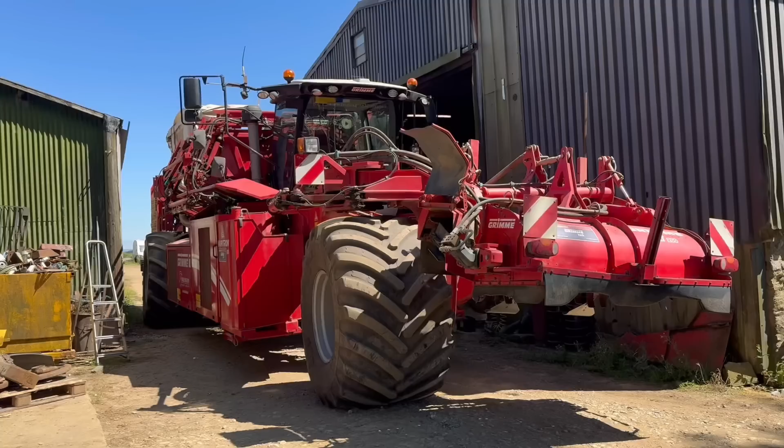Right, so what this is, it's a self-propelled potato harvester. If you've never seen one before, they're quite an impressive bit of kit. Just give you a bit of a run through on how it works first. So on the front here you've got a topper, takes the potato tops off like a flail, and then it slings the tops out the side here once it's cut them off. So that's what that front bit is.

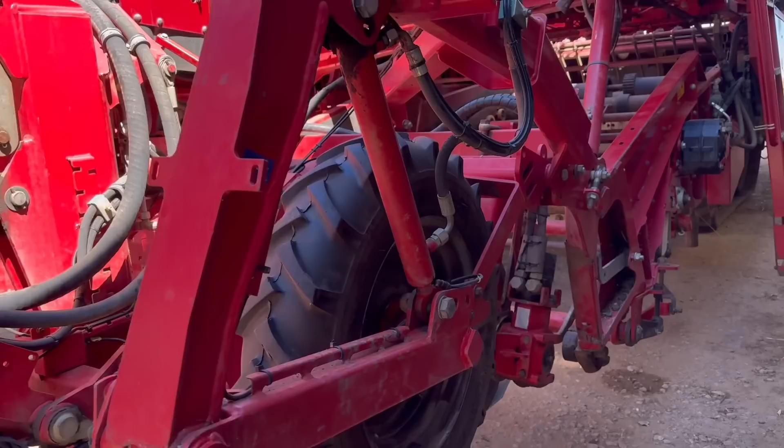I'm not all that clued up on potato harvesting equipment, so you'll have to forgive me if I get some of the terminology wrong. There's also some bits missing because they're in the process of servicing it and getting it sorted out ready.

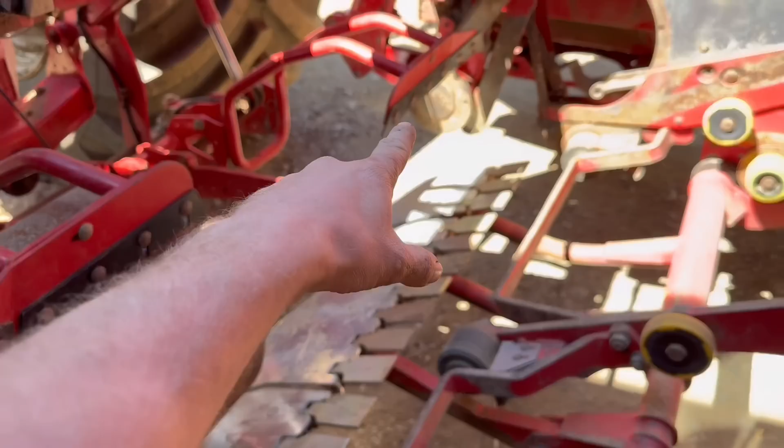So after the topper, you come to this bit here. There's usually another one of them rollers on that side, which is missing at the moment. They squash the row down while these shears or spades or whatever you want to call them go underneath the potato row and dig all the potatoes out of the ground.

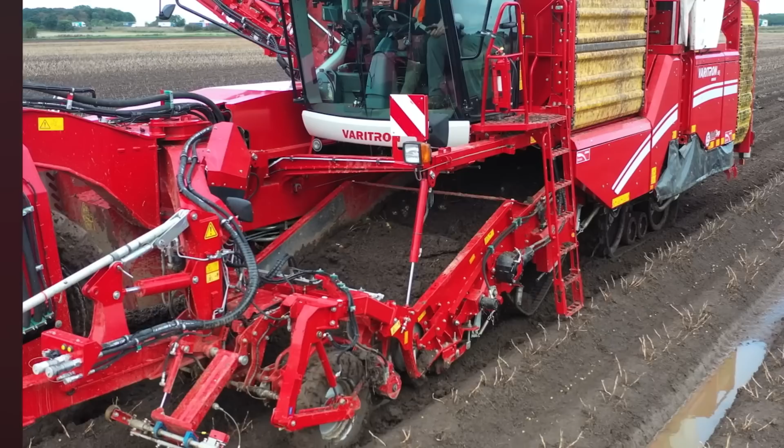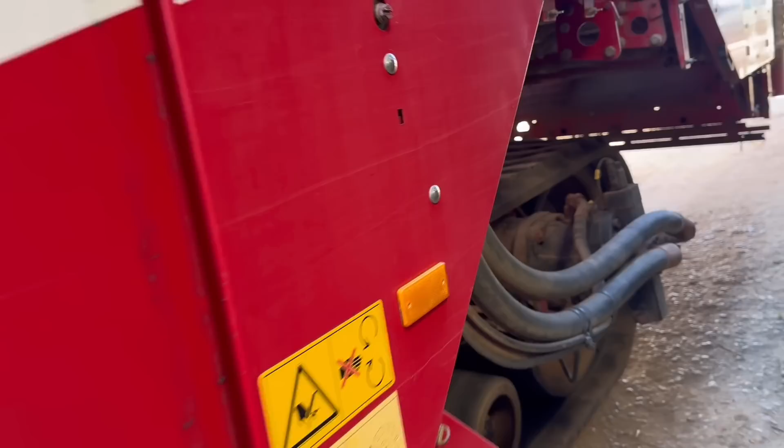And then they'll come up here, and usually in here there's a web or a big belt with loads of bars across it that take the spuds up over there, and all the soil drops out through the web. So once it's gone up there, they go all the way up here.

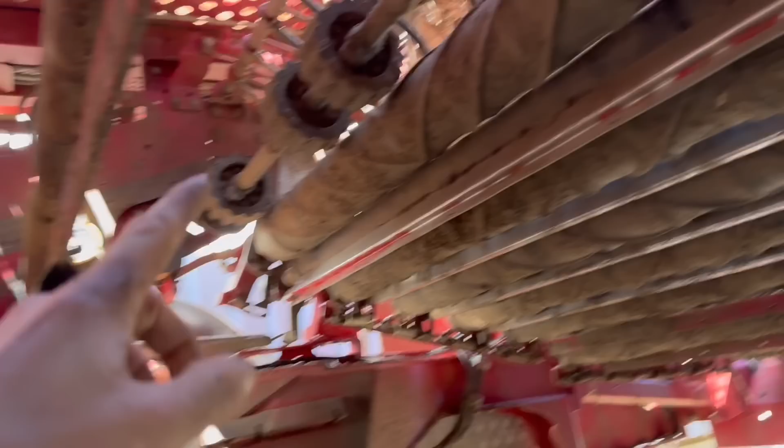I don't know if it's the same web or another one. It comes up over here, around the top of them rollers, and then onto these rollers here, the top side. Then these rollers, I think, are designed to squash all the clumps of soil. If there's any clumps, it squashes them, drops them out, and then they go over the top, down the back here.

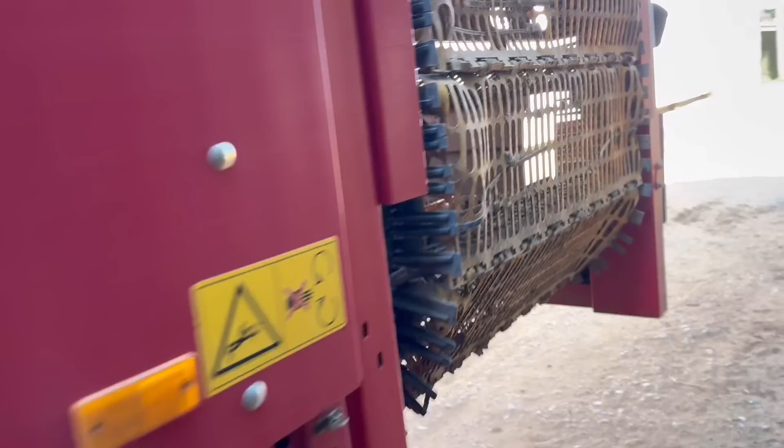So they'll come down them rollers, drop onto here. These are like what we'd have at the front, bars like that with belts, and then soil can drop through. That's what would be in the front section, but a wider one.

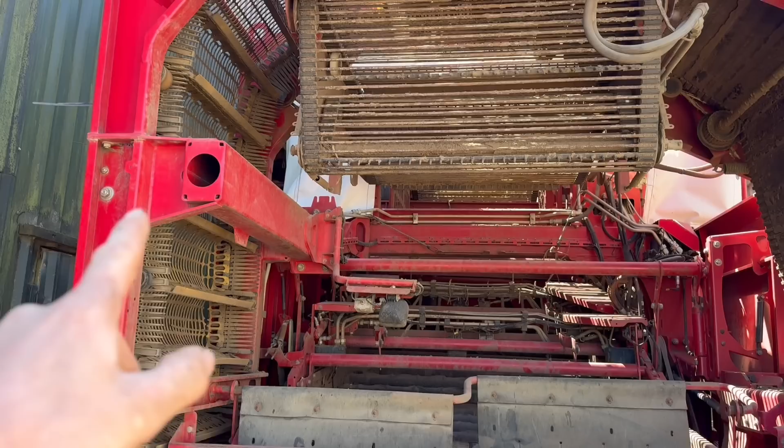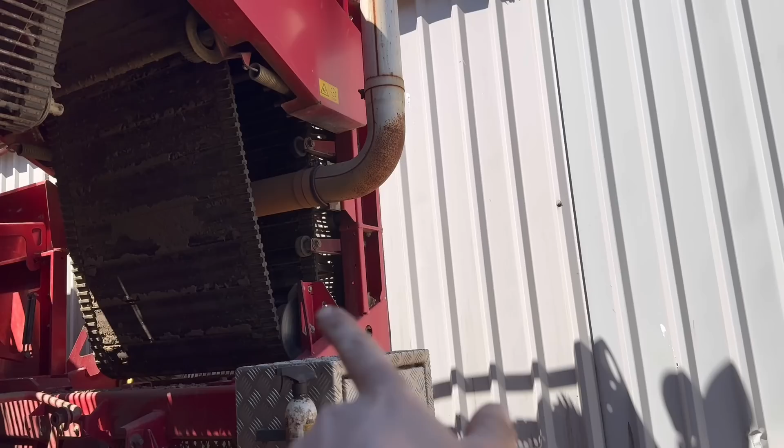So then they'll come off here, drop onto here, and then into this conveyor here. And this conveyor, or elevator, takes them around like that, up over there, and drops them onto that web. Or maybe goes that way around, I'm not sure what that belt does - maybe it stops them from dropping out. I think they go that way around and drop onto there. Then once we've dropped onto there, we'll go around here, climb up these steps.

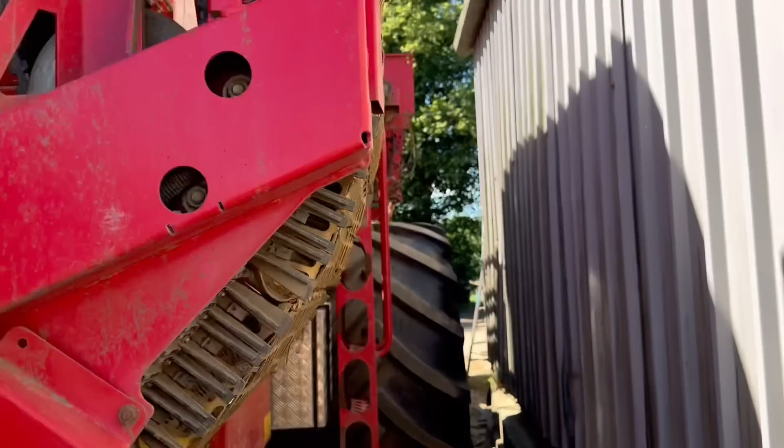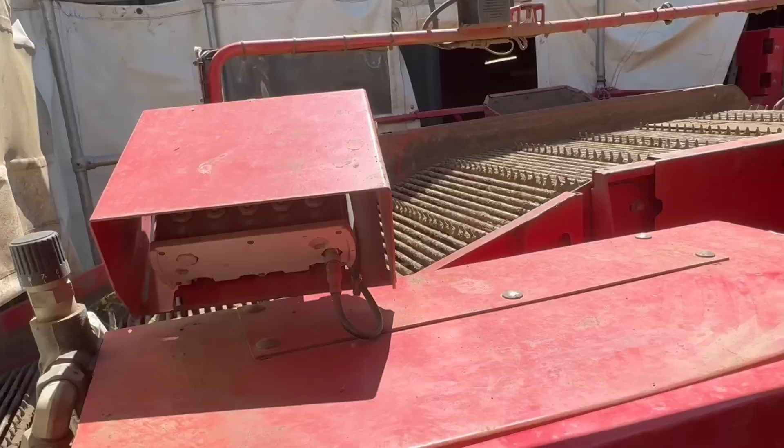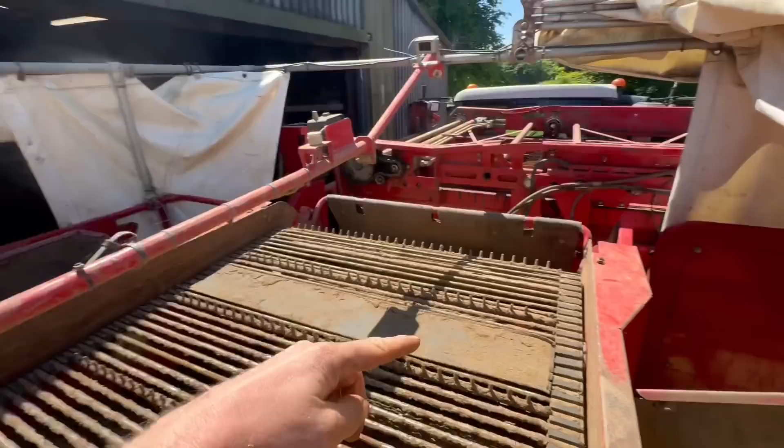And then when you get up onto here, there's another sort of belt or web, which you can see through there. That's where they've been dropped out onto here. Then they'll come up here, and you'll have 4 people stood up here - one there, one there, one there, and one where I am. They'll pick out any damaged spuds or any stones or clods that have got left behind.

They'll pick them all out and then drop them down the chute here. In this chute, there's a conveyor at the bottom that just spits them out the side of the machine. And once they've gone over here, they then go down there and into the tank.

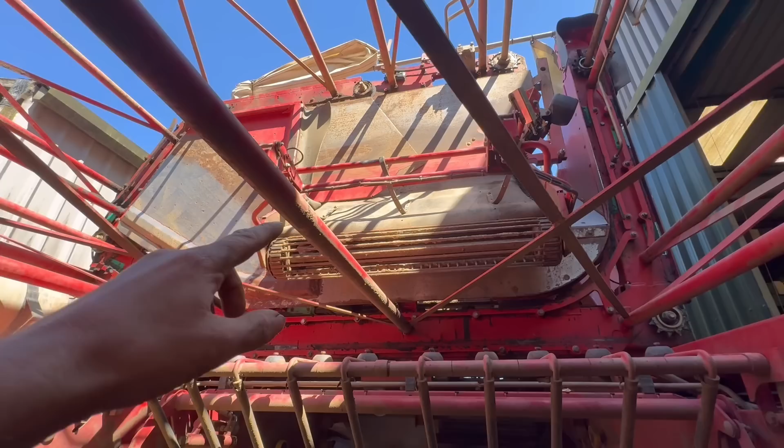So yeah, I'm sort of below the tank now. Once they've been over that last section, they'll come down here and into the tank. I'm stood below the tank at the moment, where the web would be, where the potatoes would go up over. And then there'd be...

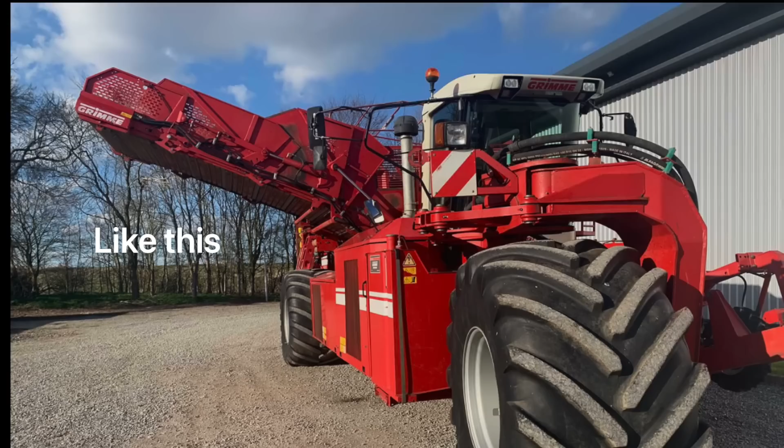It takes a bit of explaining, does this bit. That top section there folds out over. So this is like the big tank, and there's the belt or the web or whatever chain, I think, is missing out of the tank at the moment.

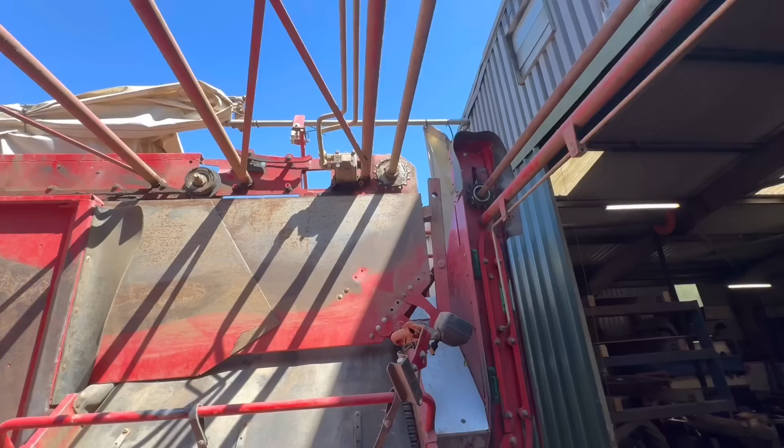I'll just climb up. So this bit from here goes all the way around there like that. There would be a chain that goes sort of around there, all the way up over there, around there, and then back around that way again.

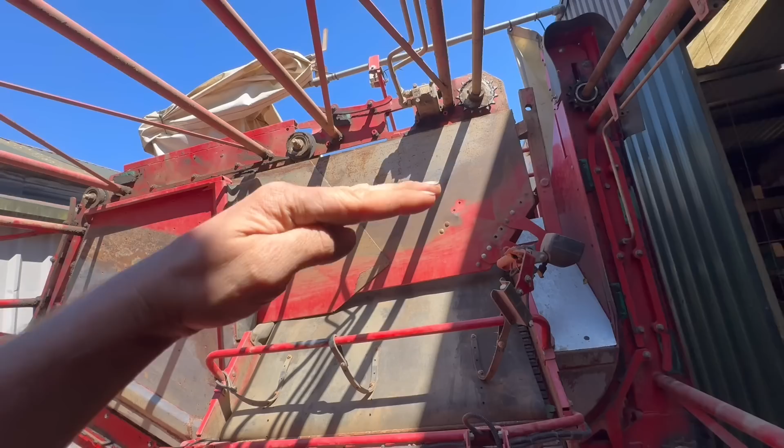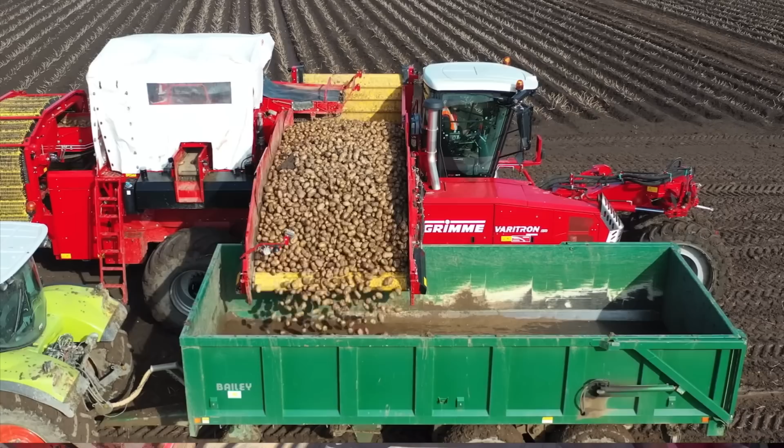It all folds out as like your unloading elevator, as well as the tank itself. So I think in here we'll hold - well, he said 2 tanks for the trailer, so I'm guessing there'll be 8-9 ton of potatoes in this sort of area once it's full.

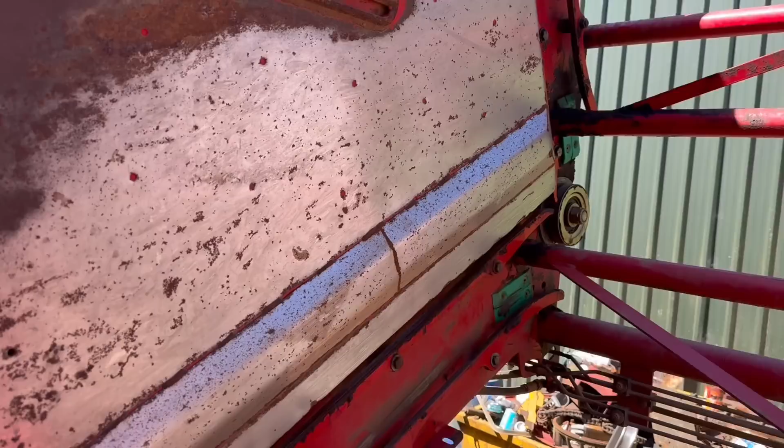I hope that's giving you an idea of what the machine does. So I'll show you what's wrong now and what's to do. On the front side of this tank frame that goes around up there, it's cracked - cracked down there, cracked all the way through there, and cracked down that other side.

Now I think that's a pretty critical point, because in the back of here somewhere, about there on the other side, is where the ram is that sort of supports it all and folds it all out. You can just see through there is where the end of the ram is, which is onto this plate here and then joins up onto there.

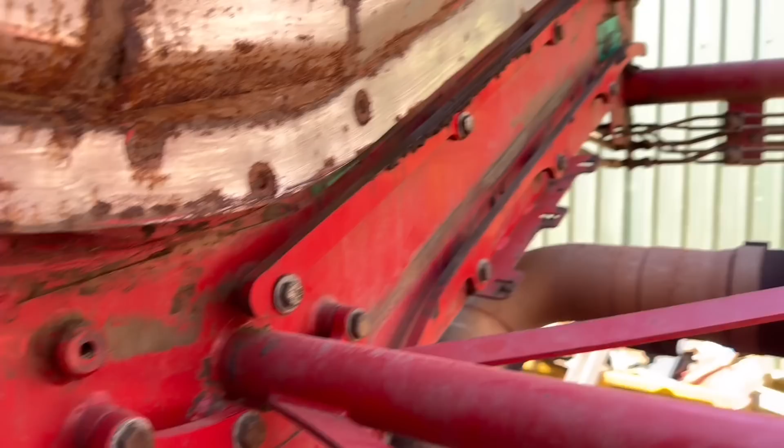Because there is so much overhang and so much weight sat out on that side, if they break through there, apparently all that side sags down onto the exhaust if it breaks all the way through, which you obviously don't want to happen. My job is to repair this, but the problem I have, without lifting all of this frame out of the machine, which would be a pretty big job, there's no way of physically getting to the other side of here, because there's the main frame of the machine at the other side.

So when you look at it from underneath, this is sort of the main part of the chassis that goes over the top here that holds up all the other side of the machine. And that is like the bottom side of it. So there's all this lot in the way.

So I'm not quite sure what to do yet. I've been having a look at it for half an hour or so, trying to think the best way to do it. I could just grind them out, or V them out, weld them back up, but it's just a crack at the other side - it's just how far down it's gone at the other side.

Because if the crack's still there and I haven't welded it up, it'll just start cracking again, but from the other side. So I'm thinking what I might do is cut a section out across there, down there, and across there by there somewhere, and just cut a square out, and then I'll be able to see in and see what's happening at the other side, how far it's cracked.

I ain't really sure how it's constructed either. I think it's maybe sort of like that, like that, like that, and pressed like that. And then you can see these bits here, they're at the bottom as well.

So I think there's another bit like that inside the bit like that as well. There's a channel that way and then a channel the opposite way. So yeah, I think I'll cut a bit out first, cut a square out, see what's what. I just need to be careful I don't cut too much out that I can't weld it back in again.

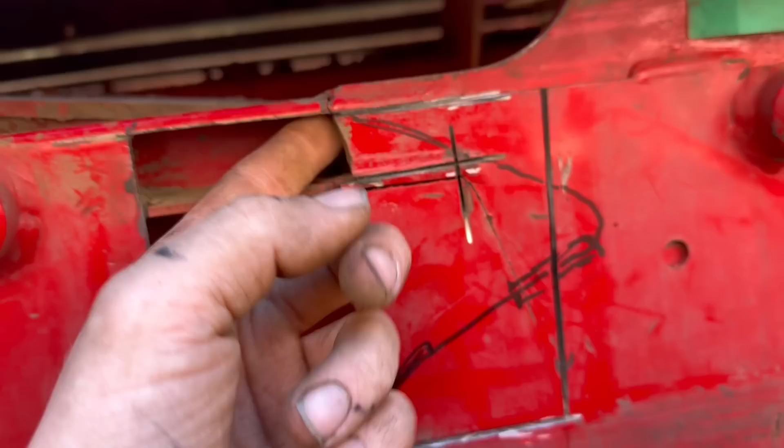So I'm hoping now I can reach in there with a die grinder and die grind that out, and then re-weld that bit from this side, and then either re-weld that bit across the top without much space, or from underneath. Get that welded back up, and then I don't know whether to carry on chopping this bit out or whether to just chop that crack out, re-weld that, and leave this bit in, re-weld around that, weld the plate back in, and then patch over the top of it.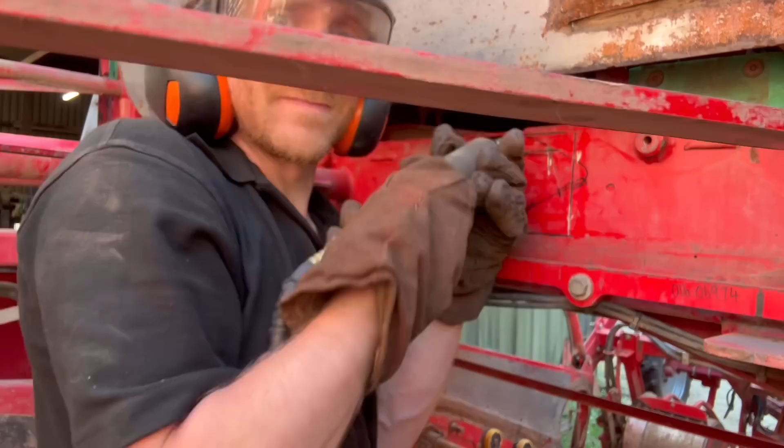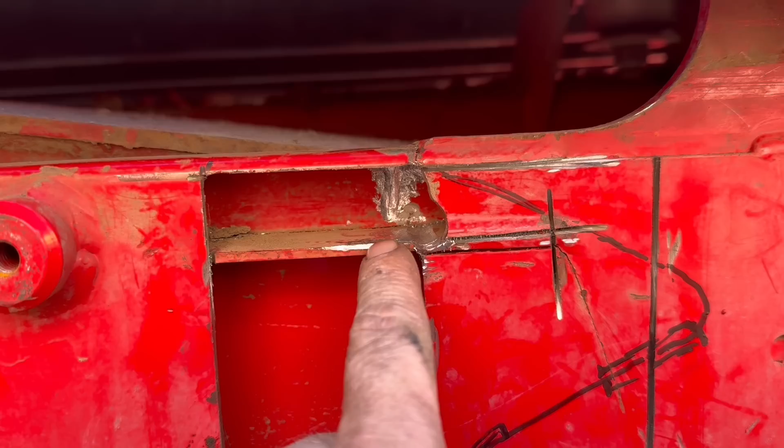So I've die ground into those cracks a bit. I haven't gone all the way through because if I can get a nice hot weld over the top of that, it should burn all the way through. I'm not sure what to do with this top one yet. I'm going to bring the welder out and get it set up, then see whether I'm best welding that one up from the bottom or from the top.

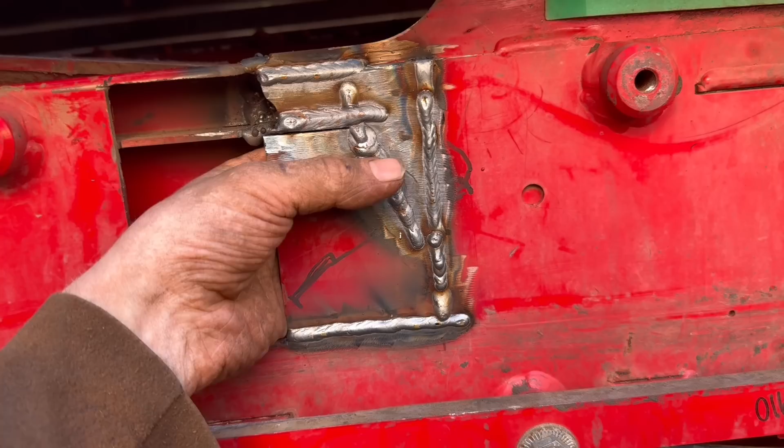Right, so I've got all that welded up. Doesn't look particularly nice, but I can feel on the back that it's burnt all the way through. That's penetrated through, that's penetrated all the way through. And I've welded them up. There's a big fat weld in there.

I had a bit too much power on really, but I welded that sort of vertical up across there. I welded underneath there and over the top of that. There's a little bit there that's bubbled out, so I'll have to try and do something with that, die grind a bit more. I'll go over it again with weld, and then same under there. So yeah, that's all that welded up.

So if I weld that square back in that I cut out of there, I think we'll plate over the top of it as well. I'll grind all that flat. But before I grind that flat, I'll weld this plate back in - the same plate I cut out, I'll just weld it back in again.

But there's a bit there that had broken out and cracked, so I've got this bit that I'll weld in first as like a backer. That'll fill in the gap. I'll just tack that in and then that'll fill the gap, and then I'm not going to be burning through then.

So then I can fill that up with weld without burning through. So I'll give that a clean up, tack that in, and then we'll weld this in.

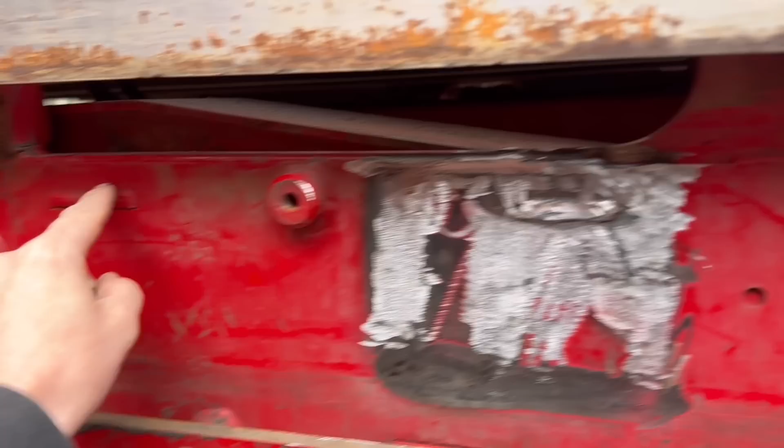I've got to go around them. I don't want to grind them off because it will grind the weld away, so I'll cut a square out to go over them, and then bring it down to here and taper it off onto that bit, and then round there.

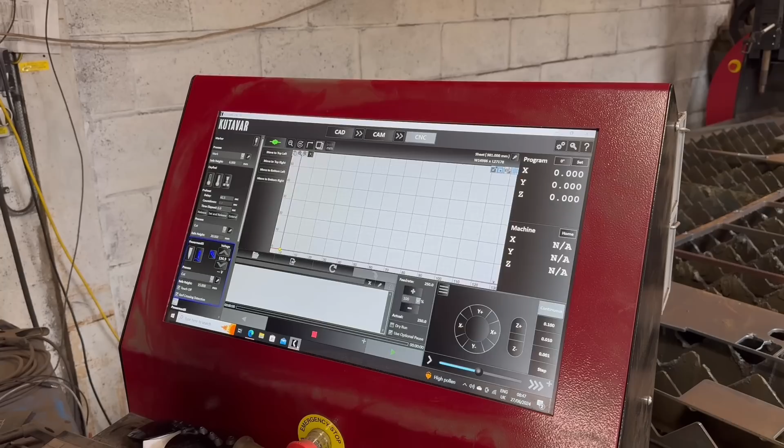So that's the plate that I've got drawn. These bits here are to go around the bits that are already welded, the tabs, and then they'll be filled full of weld.

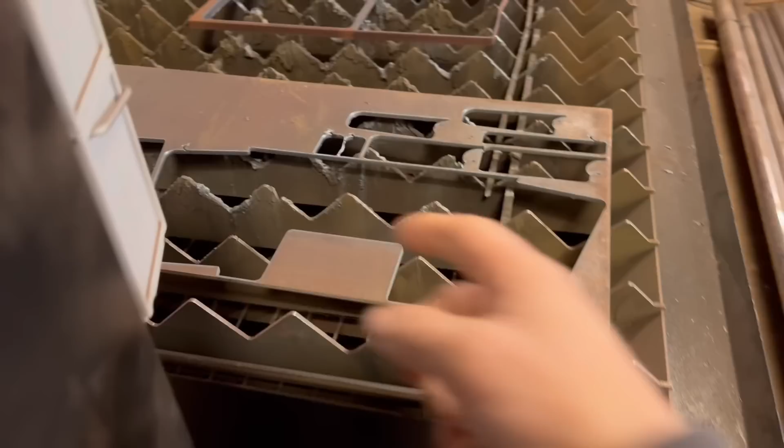So yeah, I want to get it cut out and welded on because the weather's starting to get a bit windy. I'll get that cut out with this bit, I think it's 5 or 6 mil. Could have been a bit thinner really, but I've just got that there set up, so it's easy to cut it out of that.

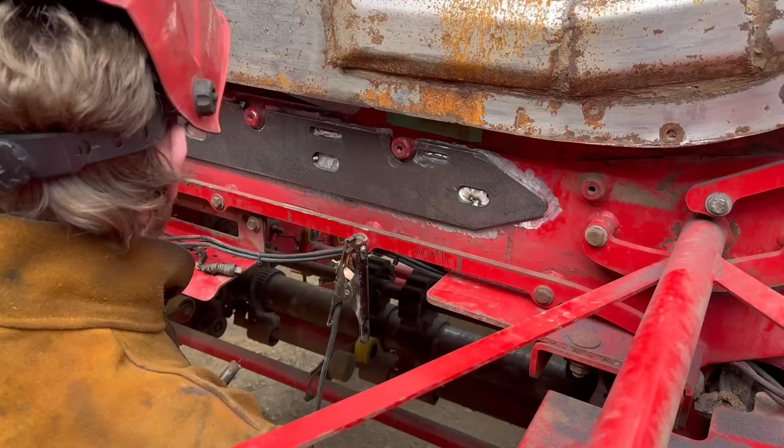Alright, so that's that bit tacked on. That should put some more strength into it. The only bother is I should have had that hole a little bit further that way because there's a hole there that's full of paint, so that won't weld up very well, but yeah, that should be alright. Puts the strength sort of back round onto there, covers over that bit where I cut out and re-welded it. So yeah, I think then we'll get that welded round now.

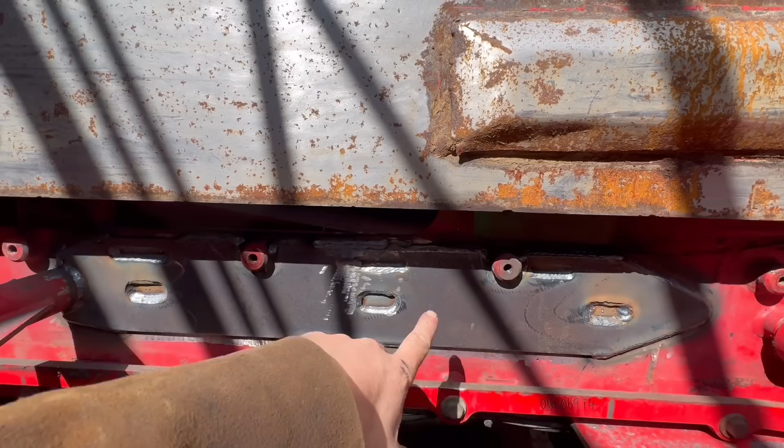Right, so I've got all that welded on. Well, I haven't welded all the way underneath. I welded most of the way across the top. There's just a bit there I haven't done. But I don't think I'm going to gain any more strength from putting any more weld on it. So yeah, I think that'll do.

There's a bit in the middle there that was a bit splattery. I had to grind that back out and re-weld that. Yeah, the rest of it's alright. Didn't quite have enough power on to start with, then I had too much power on, and then turned it down a bit. I'm about right, using a little Jasic again. Real handy little welder is that.

So yeah, I'll give that a go over with just tidy it up with a sanding disc, and then that'll do.

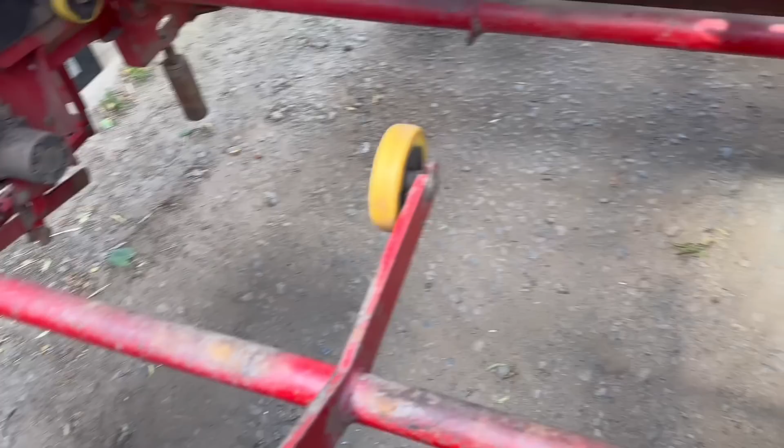So yeah, I can get out from underneath here now. It's not been the easiest place to get into. You have to climb underneath, and then working off a step ladder, this bit's in the way. Every time you get up the step ladder, this bit catches you in the back. Anyway, I can get out from under here now because this is all done.

So yeah, that's that job done. I've also had a day at Hillhead this week, Hillhead Show, which is in a quarry, which is pretty interesting, looking at all the quarry equipment and big excavators. I got a little bit recorded, but I didn't record too much. I'll put those clips in at the end. But yeah, it was just interesting seeing how well things are made in that industry compared to agricultural.

Agricultural stuff is sort of made to a price, whereas quarry equipment and mining stuff and big excavators looks like it's built to last rather than to a price. So I wouldn't mind doing a bit more work on plant stuff.